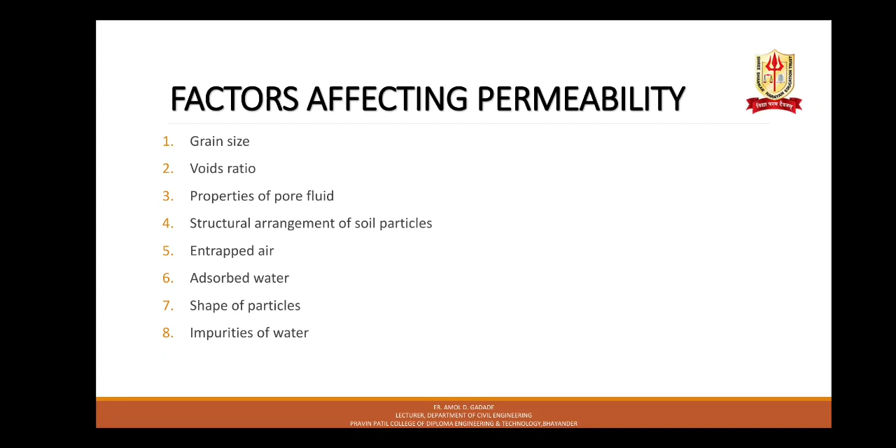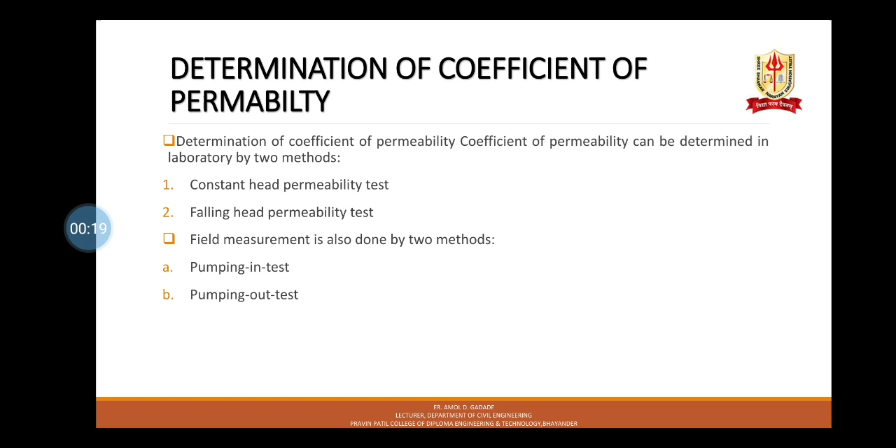So now let's start with this determination of coefficient of permeability. Coefficient of permeability can be determined in laboratory by two methods. The very first one is constant head permeability test, and second one is falling head permeability test. Field measurement is also done by two methods, like pumping in test and pumping out test.

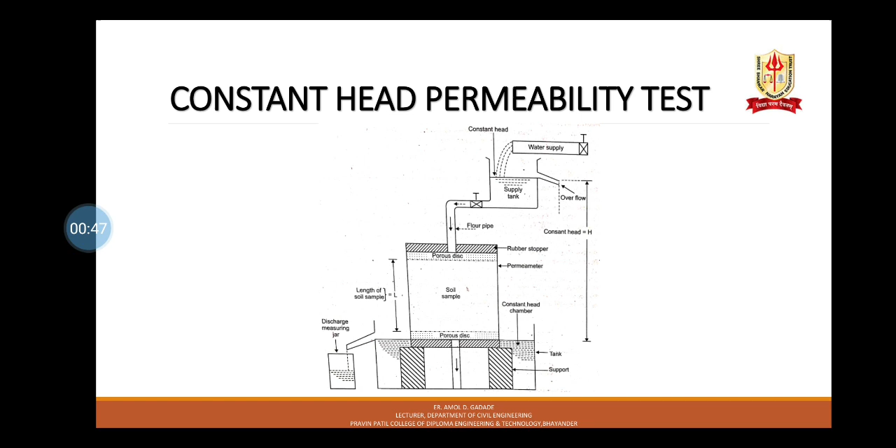So the following diagram is of constant head permeability test. You can see here the typical type of arrangement or experimental setup is maintained. Here the head is maintained at a level by means of a supply tank. In the supply tank, an overflow pipe is made by which the rate is kept stable.

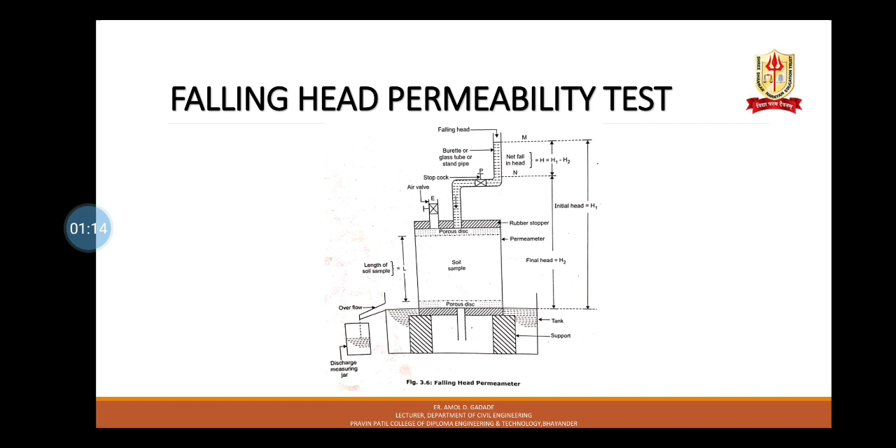Moving further to effective pressure and pore pressure. When soil mass is submerged under water, the interconnected voids in the soil get completely filled with water. Under static equilibrium conditions, this water in the pores exerts pressure in all directions. This is called pore pressure.

The pore pressure reduces the intergranular contact pressure between the soil grains. The pressure transmitted from particle to particle at their point of contact is effective in bringing soil particles together, and is called effective pressure. In other words, it is effective in reducing the void ratio. It is also helpful in increasing the shear strength of non-cohesive soil.

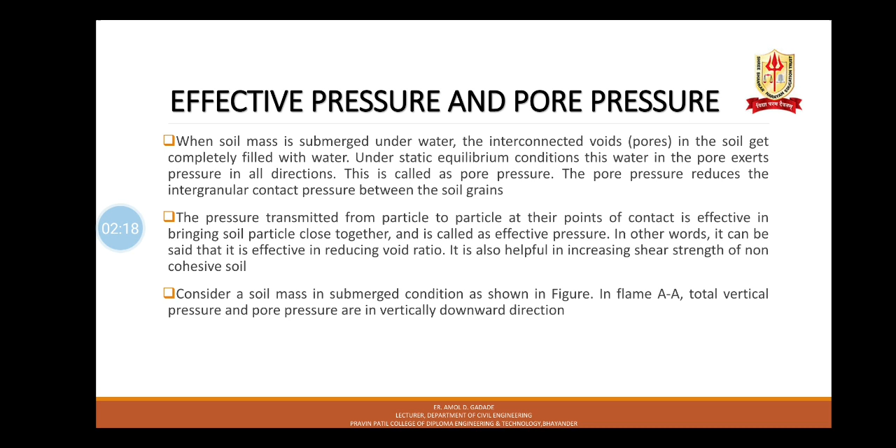Consider a soil mass in submerged condition as shown in the figure. Here you can see a typical type of soil mass below a height or depth L, below the water. So there the total pressure equals effective pressure plus pore pressure. Effective pressure and pore pressure are shown by different signs and symbols.

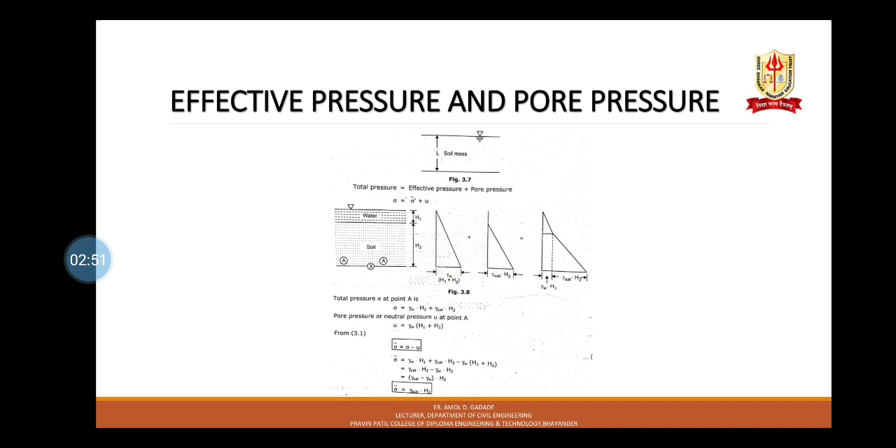You can see in the diagram, here is the water and submerged soil present. Look at the diagram: the depth of water is h1, and the depth of soil is h2. The very first diagram is shown for gamma W, that is the bulk unit weight of water. The second one is gamma submerged, that is for the soil which is submerged below the water.

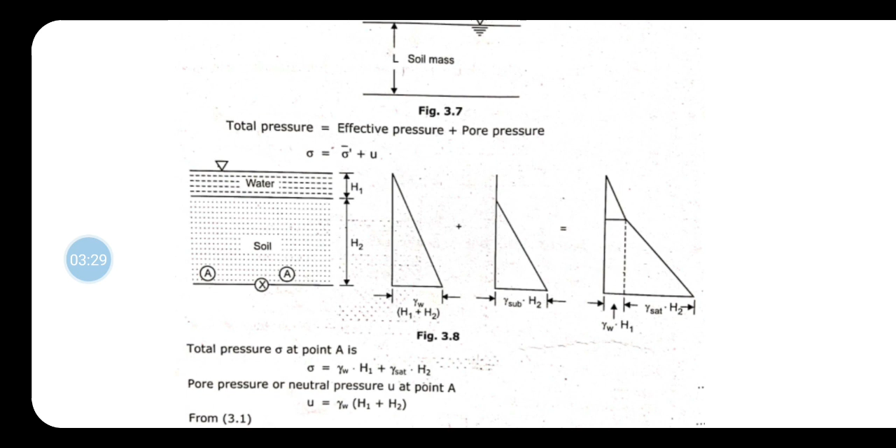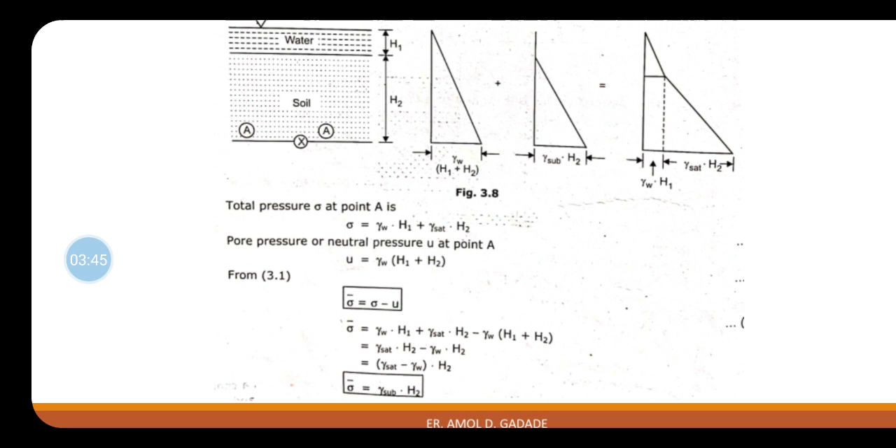By adding these two we can get the total pressure diagram. So here you get the total pressure diagram: gamma W times H1, where H1 is the height of water, plus gamma saturated times H2, where H2 is the height of saturated soil. By adding these two we get this formula, which will be covered more in our theory lecture.

Next one is seepage pressure. What is seepage pressure then? Water exerts pressure on the soil through which it proceeds, which is called seepage pressure. The seepage pressure is exerted due to the friction of water flowing through the soil. The pressure acts in the direction of the flow of water.

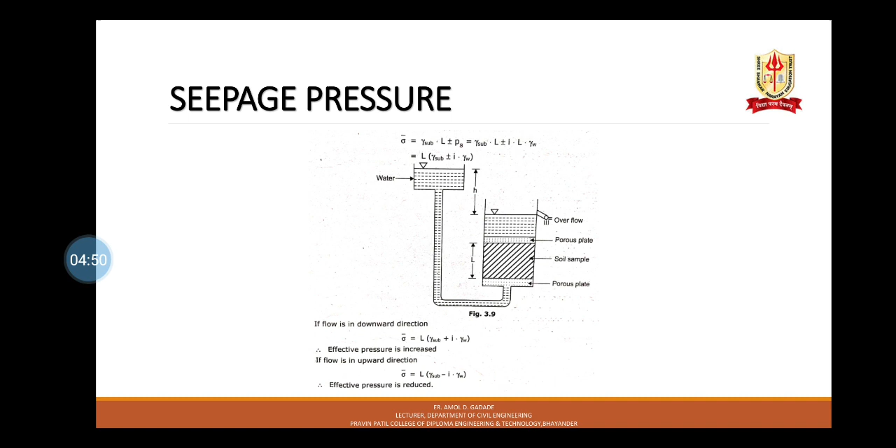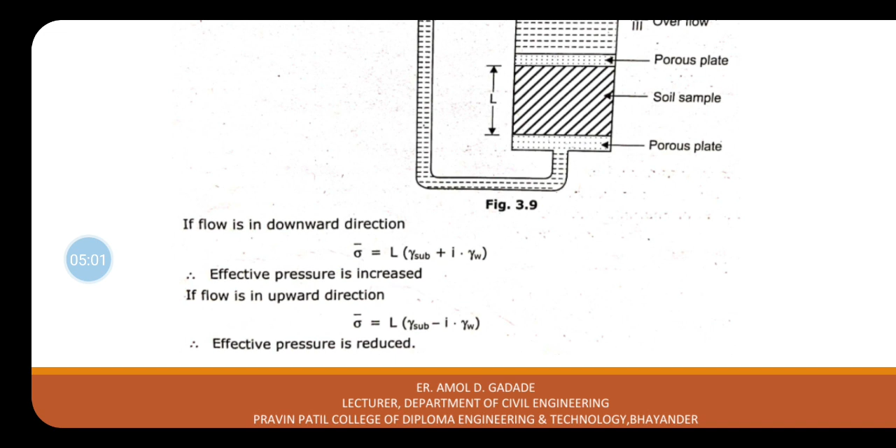If H is the hydraulic driving head or head loss which causes water to flow through a soil mass of length L, then the seepage pressure developed is given by gamma W H, where gamma W is the unit weight of water and H is the hydraulic head. So we can write and derive this formula as shown in the figure, for flow in the downward direction, with the effective pressure generated also shown in the diagram.

Next is the quicksand condition, also called quicksand or boiling condition. It is not a type of sand, but rather a condition occurring in sandy or silty soils. When the seepage pressure is in the upward direction and equals the submerged weight of soil, the effective pressure reduces to zero. As effective pressure is the intergranular pressure at the points of contact of soil grains, there exists no friction between grain to grain, and hence the soil loses its shearing resistance and shearing capacity, and the soil will behave like a very viscous fluid.

This condition is very dangerous, as such soil does not have any supporting power. Any man or animal stepping on it will sink.

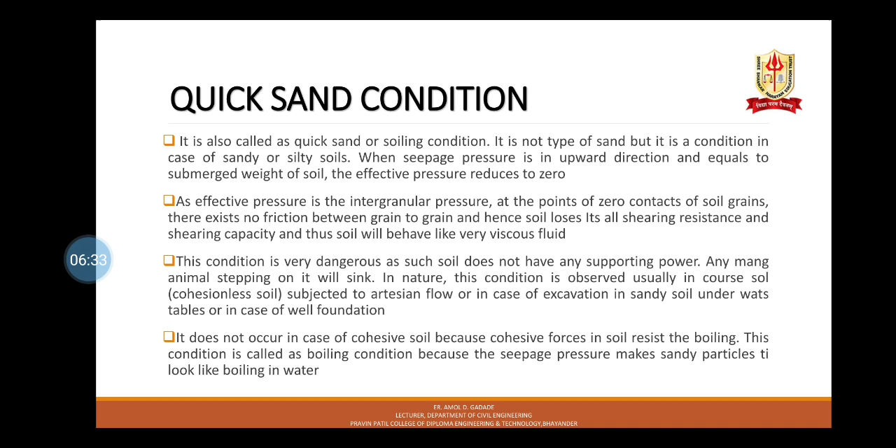In nature, this condition is observed usually in coarse soils or cohesionless soil, subjected to artesian flow, or in the case of seepage pressure, such as excavation in sandy soil under the water table, or in the case of well foundation. It does not occur in cohesive soil because cohesive forces in the soil resist the boiling. This condition is called the boiling condition because the seepage pressure makes sandy particles look like they are boiling in water.

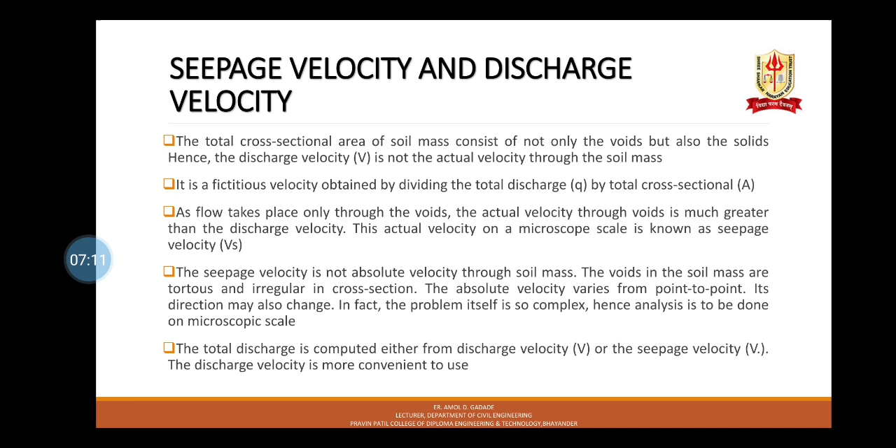Next is seepage velocity and discharge velocity. The total cross-sectional area of soil mass consists of not only the voids but also the solids. Hence, the discharge velocity is not the actual velocity through the soil mass. It is a fictitious velocity obtained by dividing the total discharge Q by the total cross-sectional area A. As flow takes place only through the voids, the actual velocity through the voids is much greater than the discharge velocity. This actual velocity, on a microscopic scale, is known as seepage velocity.

This is the derivation for seepage velocity. From the continuity equation of flow, we get Q is equal to VA, where V is velocity and A is cross-sectional area. Here V is the discharge velocity. Instead, we will write seepage velocity, Vs, and Av is the area of voids. So we can match the two equations: VA is equal to Vs into Av. The equation can be written as Vs is equal to V into A upon Av.

Multiplying and dividing by L, we can write A into L upon Av into L, where A into L is V1, the total volume of soil mass, and Av into L is Vv, the volume of voids. So Vv upon V1 is porosity, which we write as N. So Vs is equal to V upon N, where V is equal to Ki. So our formula becomes Vs is equal to Kp into i, where Kp is known as the coefficient of percolation.

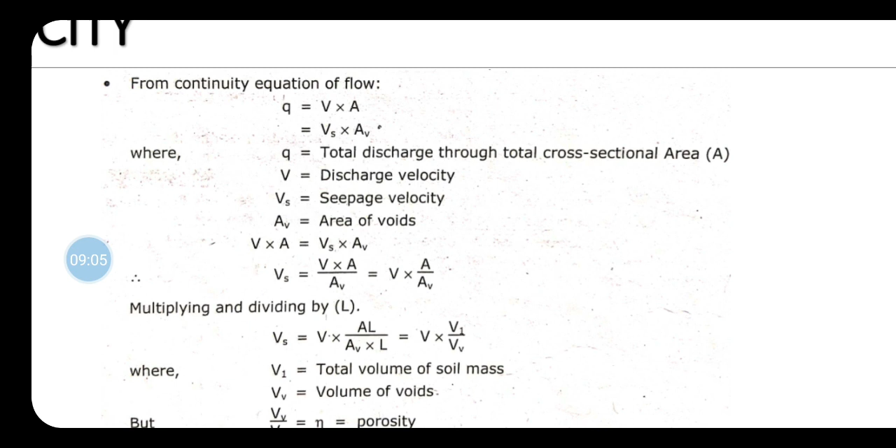The seepage velocity is not the absolute velocity through the soil mass. The voids in the soil mass are tortuous and irregular in cross section. The absolute velocity varies from point to point, and its direction may also change. In fact, the problem itself is so complex that analysis must be done on a microscopic scale. The total discharge is computed either from the discharge velocity or the seepage velocity, but the discharge velocity is more convenient to use.

Next is critical hydraulic gradient. It can be defined as the minimum hydraulic gradient at which soil grains just lose contact with each other. Thus, the shearing strength of sandy soil becomes zero, and physically the sand is in the boiling condition at the critical hydraulic gradient. Considering that flow is in the upward direction as shown in the figure, and fixing the effective stress as zero for the occurrence of quicksand condition, that is, sigma bar equal to 0.

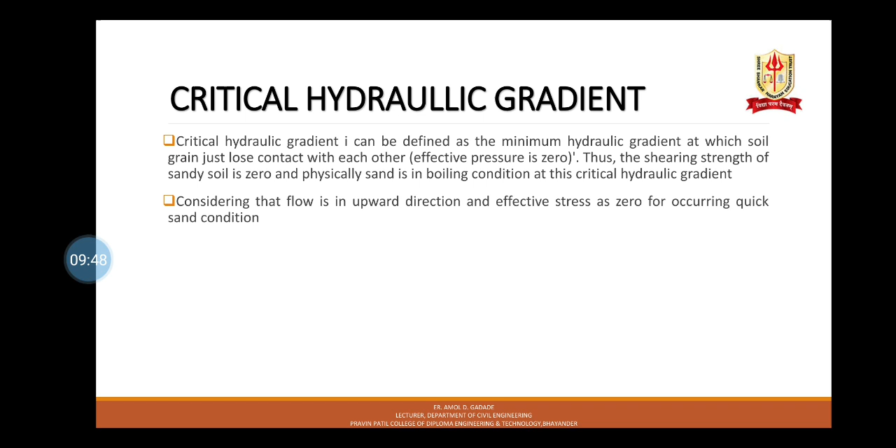Next is flow line. When seepage takes place through soil mass, the path along which water flows under laminar flow condition is called a flow line. Flow lines are used to construct a flow net. Water flows from higher head to lower head, hence we can draw a series of smooth curves representing the path followed by moving water particles.

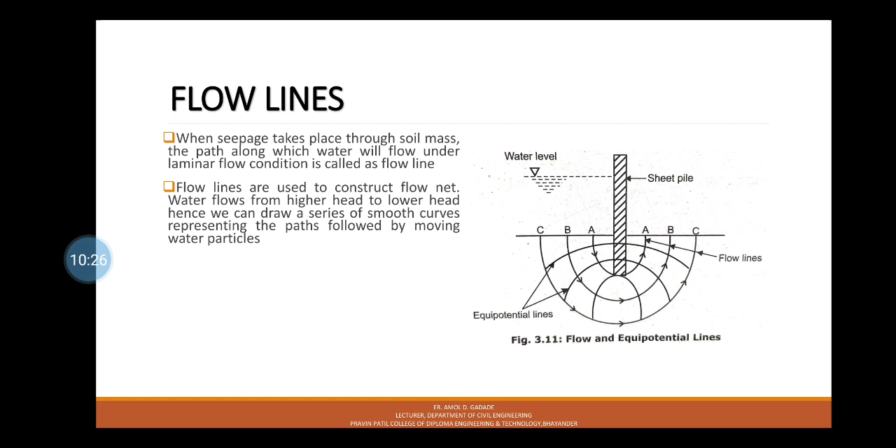This is the diagram of flow lines and equipotential lines. Here you can see the flow lines and equipotential lines. Now the concept of equipotential line: an equipotential line is the line passing through points of equal hydraulic potential or head. If piezometers are inserted along the equipotential line, water will rise to the same elevation in all the piezometers. Equipotential lines are always perpendicular to flow lines.

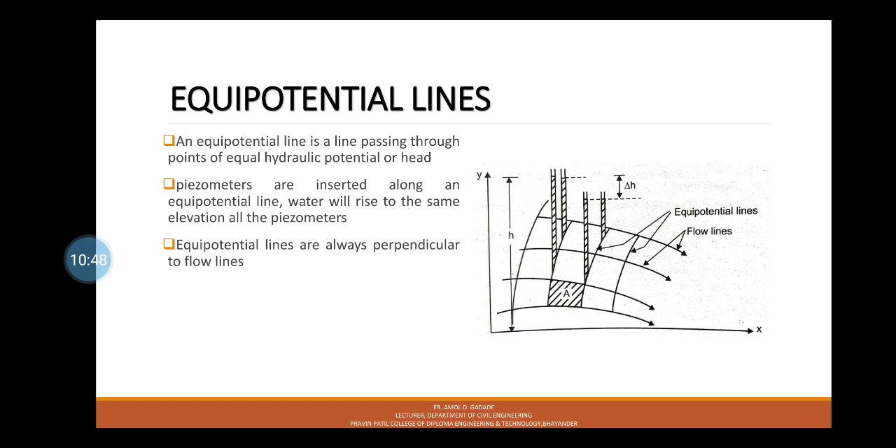Below the phreatic line, the soil is saturated completely. Along the phreatic line, hydrostatic pressure is zero.

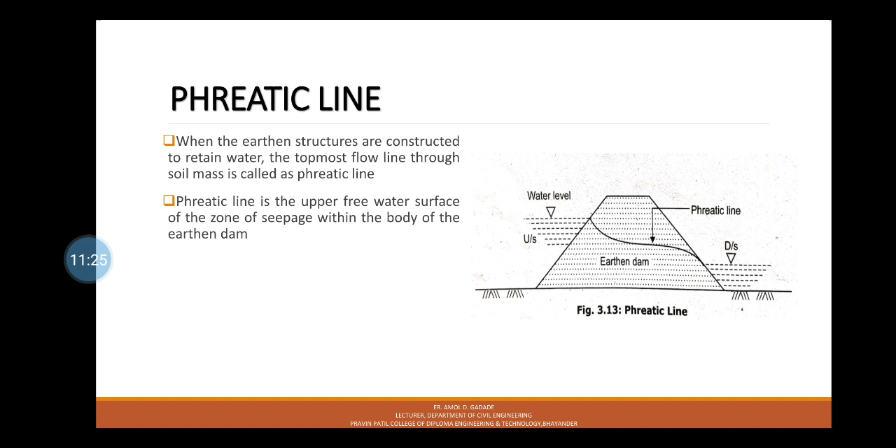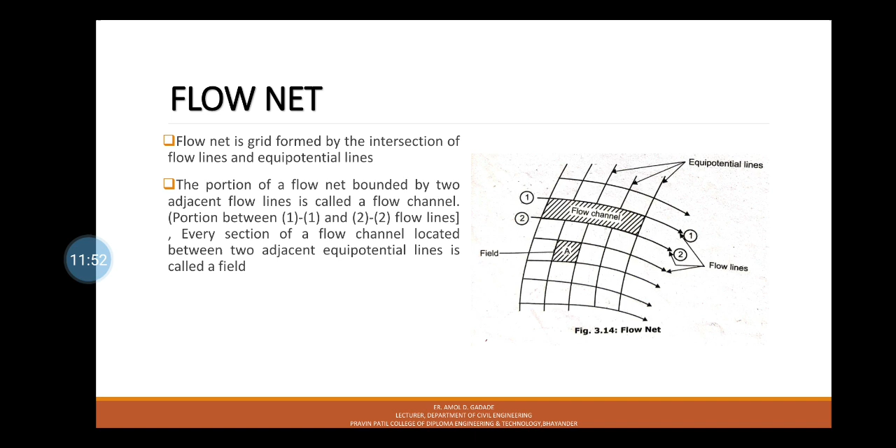Next are flow nets. A flow net is the grid formed by the intersection of flow lines and equipotential lines, as you can see in the diagram. The flow lines and equipotential lines intersect orthogonally. The portion of the flow net bounded by two adjacent flow lines is called a flow channel. Every section of a flow channel located between two adjacent equipotential lines is called a field.

So here are some characteristics of flow net: the flow lines and equipotential lines meet at right angles to each other. The quantity of water flowing through each flow channel is the same. The same potential drop occurs between two successive equipotential lines. The fields are approximately squares. The flow net represents the flow pattern and dissipation of hydraulic head.

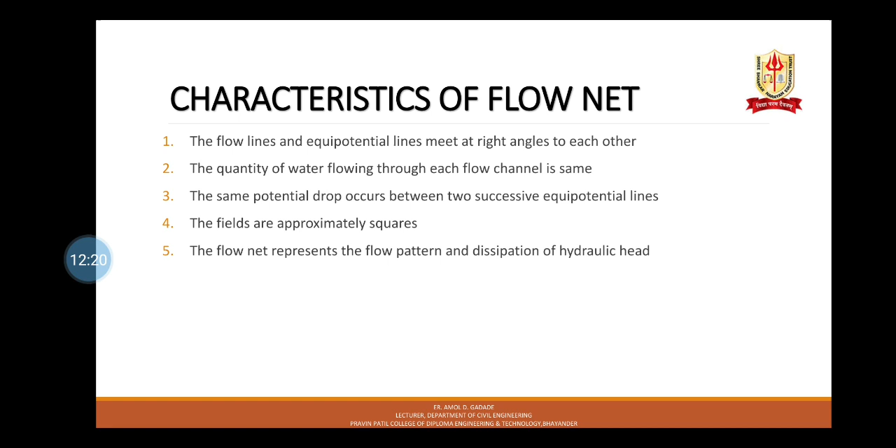Next is construction of flow net. The flow net can be obtained by any one of the following methods: solution of Laplace equation, electrical analogy method, soil models, plastic models, or graphical method. Since the graphical method is widely used, it is explained below.

Graphical method: the commonest procedure for obtaining a flow net is the graphical method, a trial and error sketching method for seepage problems with well-defined boundary conditions. A reasonably good flow net can be obtained by practice, by adhering to the correct boundary conditions, and use of square figures. The following points may be observed to obtain a reasonably good flow net.

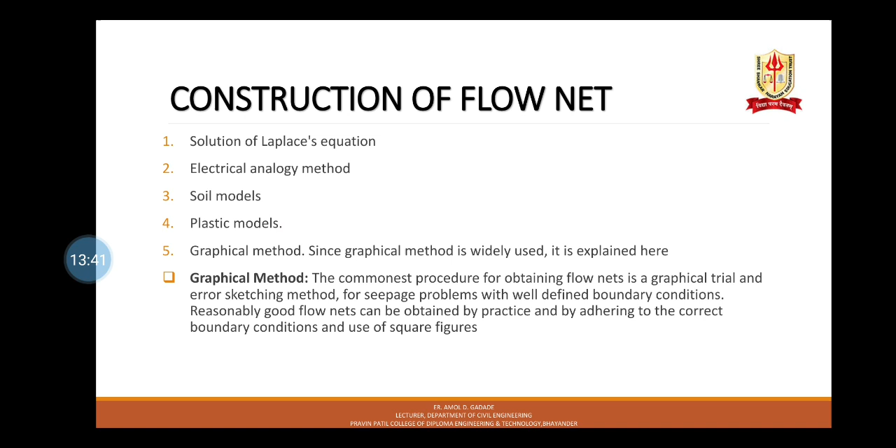Talking about right angles: flow lines and equipotential lines must cross at right angles. Square block: the area formed by intersecting flow lines and equipotential lines must be as near square as possible, that is, the central dimensions should be equal. A useful test is to visualize whether a circle can be placed inside the block and touch all four sides.

Normally 4 to 5 flow channels are sufficient. The entire flow net should be observed, not just a part of it. The curves should be roughly parabolic or elliptical in shape. The flow lines and equipotential lines should be orthogonal and form approximate squares. All transitions should be smooth. The size of the squares in a flow channel should change gradually from upstream to downstream.

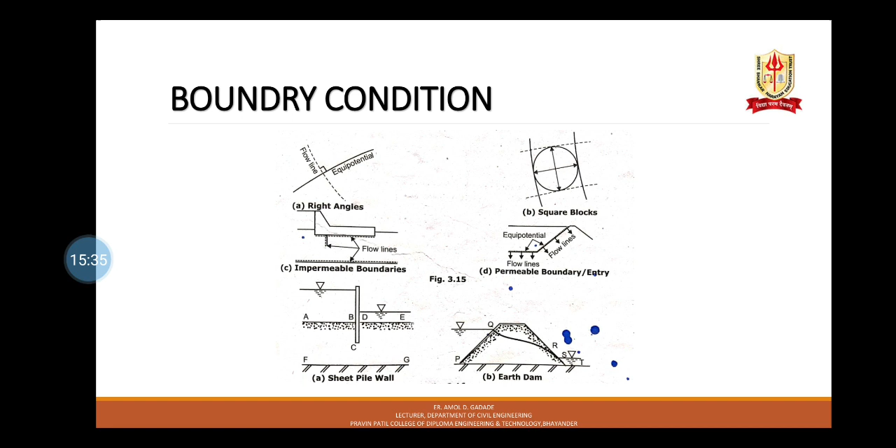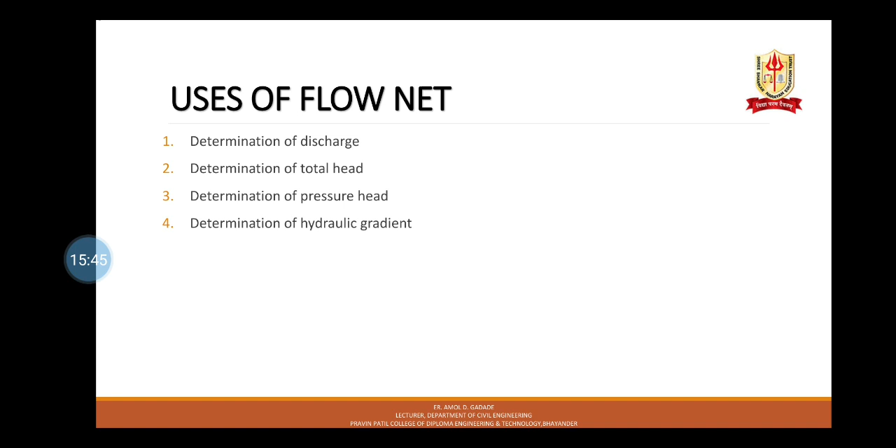Here are some uses of flow net: for determining discharge, for determining total head, for determining pressure head, and for determining hydraulic gradient. We use the flow net for these purposes.

Talking further about shear failure of soil, which is the second part of our chapter, we will start it in the next video.